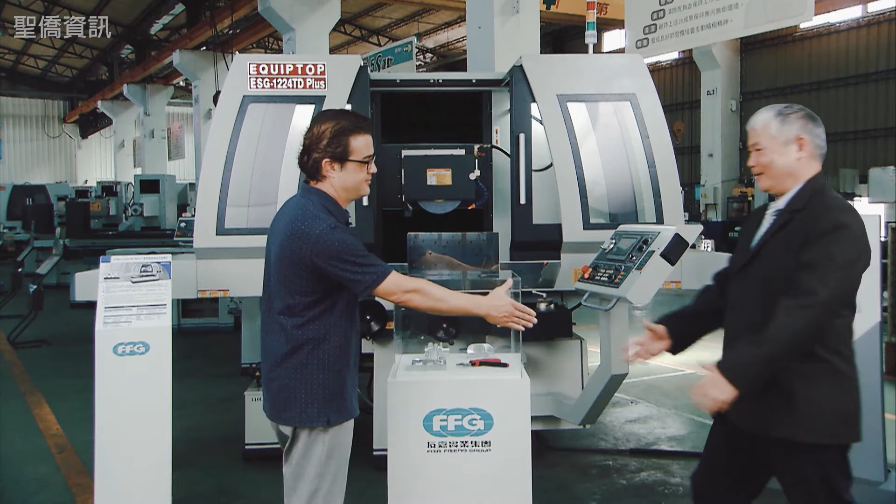Look at that. We're going to ask Charles how he did this. Charles? How are you? Nice to meet you too. How did you do it?

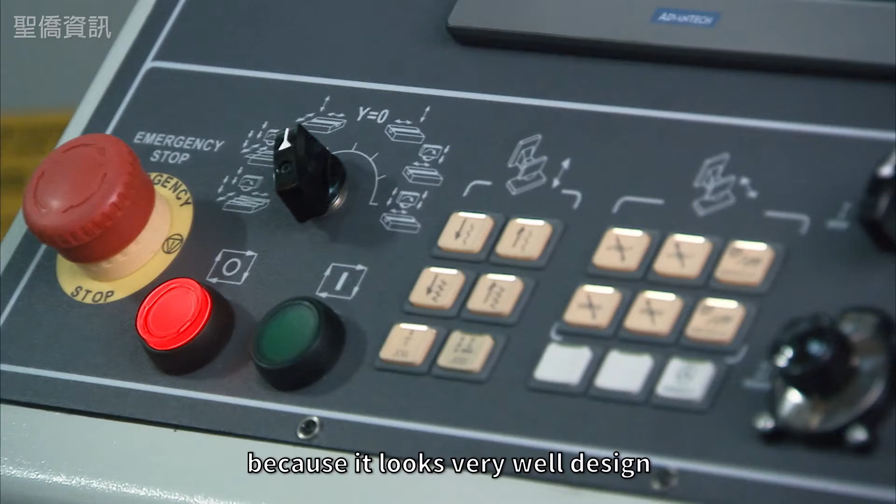Hello, Robert. Nice to meet you. How's it going, Paul? How are you? I'm fine. Good morning, sir. Can you show us how to use this touchscreen panel because it looks very well designed, very well laid out?

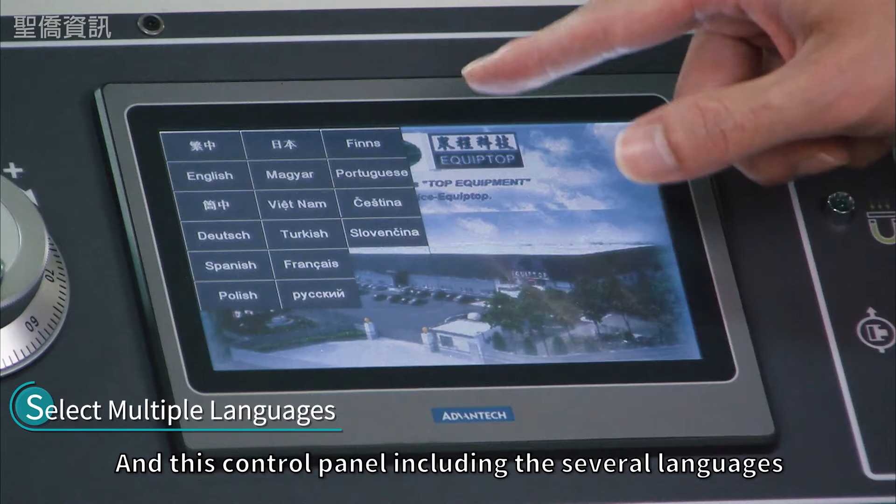Let me introduce the basic function. This controller panel includes several languages depending on the demand from the customer. I'll show you the English version.

This machine displays the Y and Z position here by the encoder device. And to set the touch point and the distance to go, the position, and the rough grinding and fine grinding micron setting.

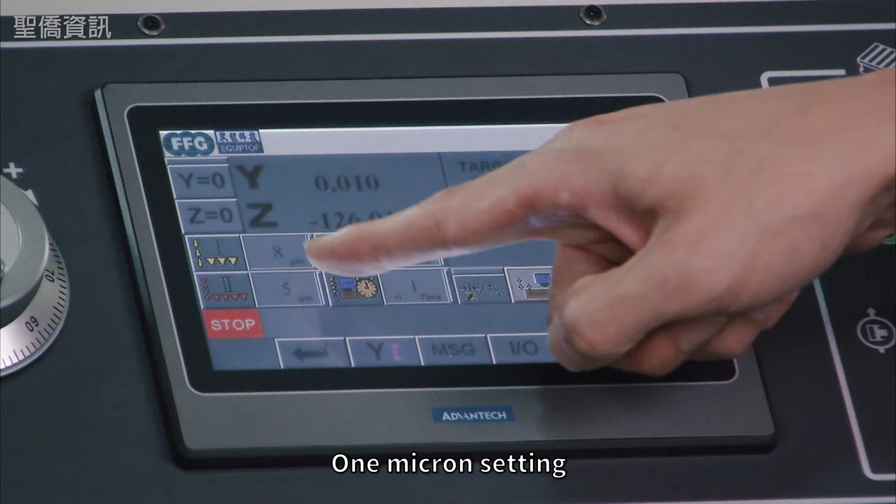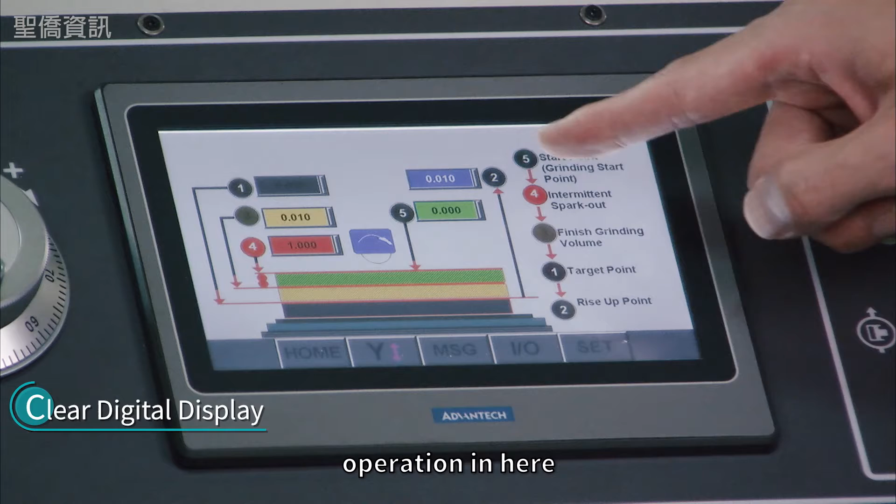This page is for setting the micro downfeed, the grinding value setting operation here. You can set the touch point, rise up point, and the finish grinding volume, intermittent spark out, and the start point. And this page will show you all the alarm message recording.

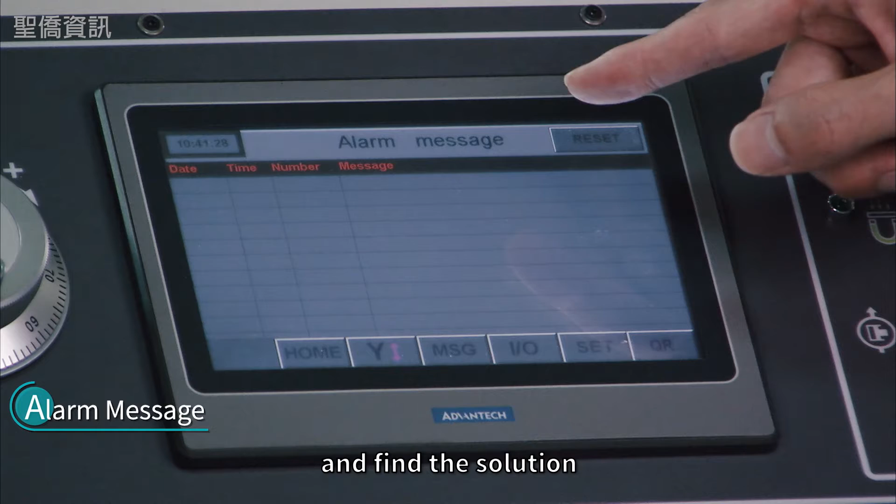Any problems, we can see it right here. We can see the alarm message showing and find the solution with the technician and the electrician immediately. Also, this IO monitoring page is to check all the devices, including how this machine is running here, such as the hydraulic system.

You can see each device, what happened. This is here, very detailed and comprehensive.

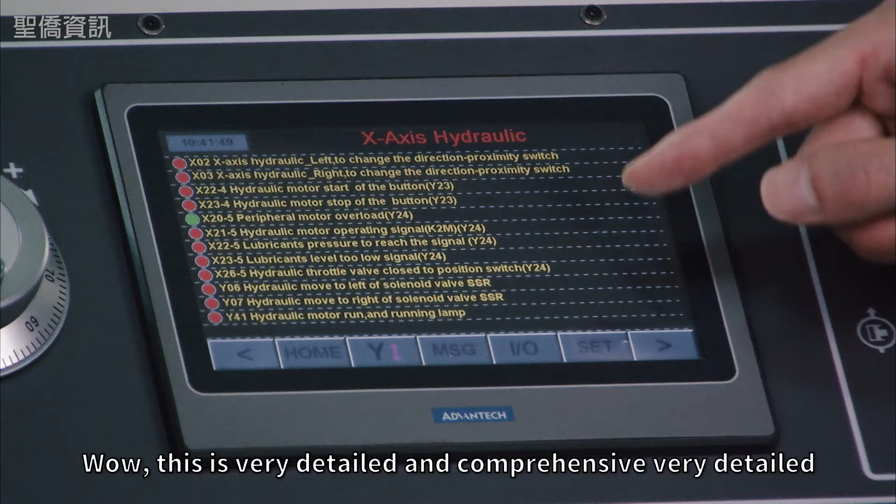You can see the servo motor for the Y-axis and its running condition here, like this one. And this is for the Z-axis servo motors.

Well, it's a very nice laid out panel. It looks pretty easy to use. It makes me feel like I want to get into the grinding profession.

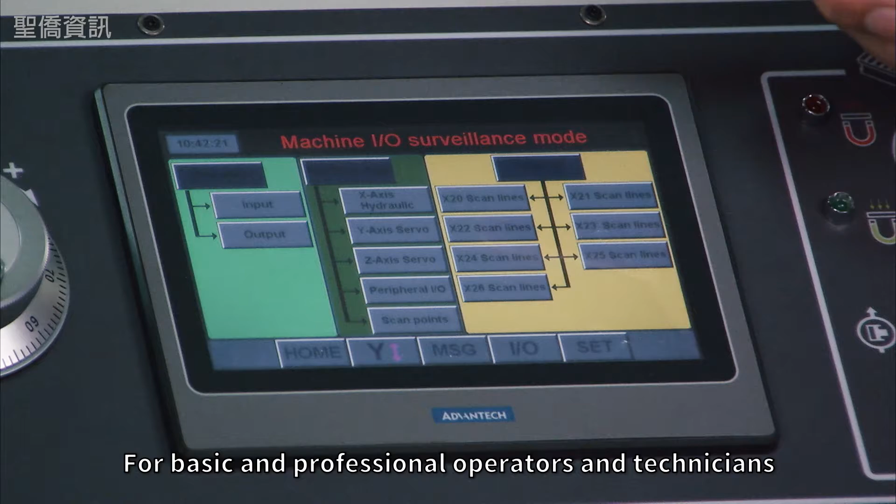Sure, it's a friendly operation interface for the basic and for the professional operator and technician. It's easy to understand how to use it.

And this is the parameter setting here. So any parameter could be set depending on the demand of the customer.

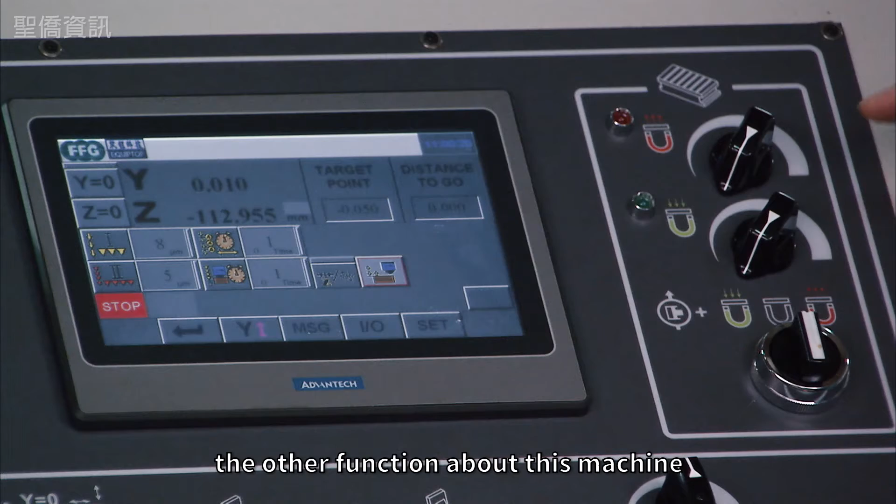So we'll show you the other function about this machine. Now turn on the magnetic power here. And adjust the magnetic power to the maximum here.

And finish grinding. Now this is the demagnetizer. It shortens the demagnetizer time here from this knob. This is a basic, easy function to control the magnetic power here.

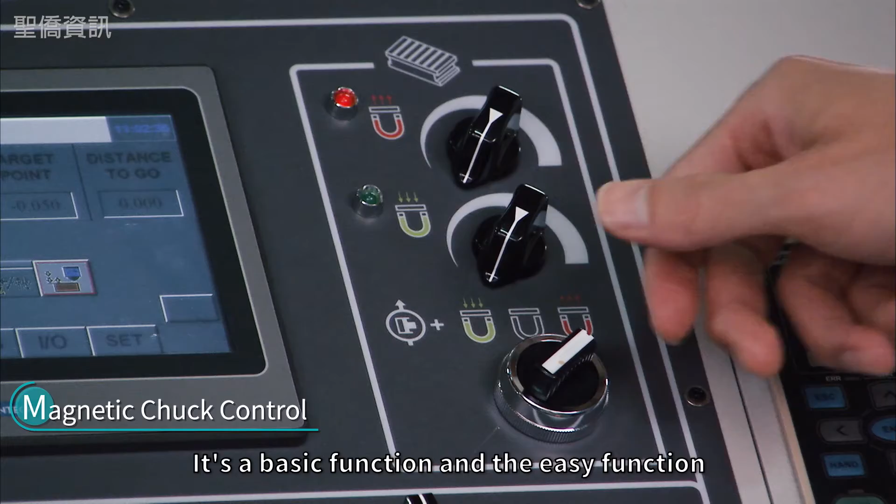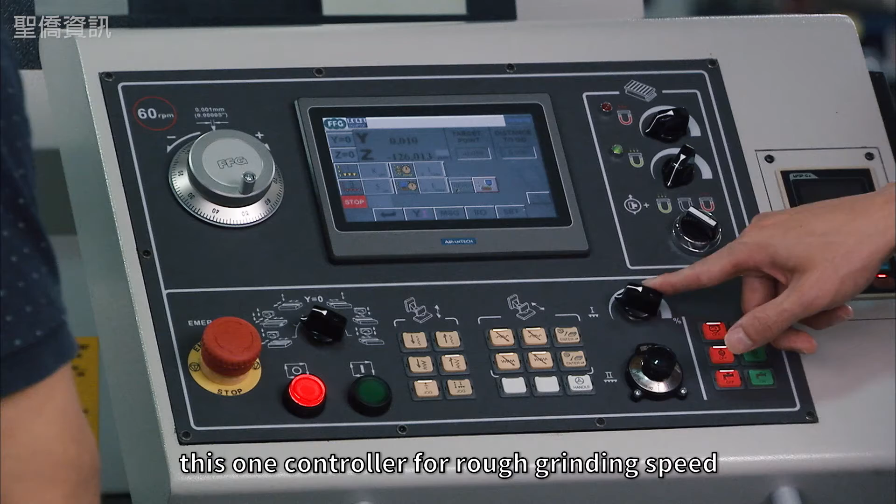And this one is to control the grinding wheel, hydraulic system, and the coolant system here. And this one controls the rough grinding speed, and there are 5 grinding speeds here.

I see you even have the MPG in the control panel. Yes, this MPG is a standard function for this machine. It could be adjusted 1 micron each down when you turn each graduation here.

Wow, that's very easy. It's very fine resolution here.

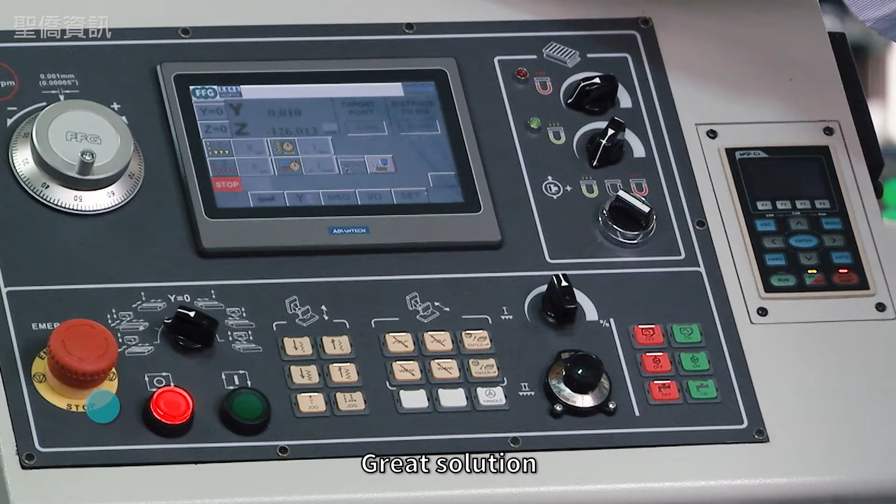And this is for setting the point for backward and forward position here. When you want to operate the cycle start here, just push here.

Hey, I think I can do this myself. Yeah, you can see yourself.

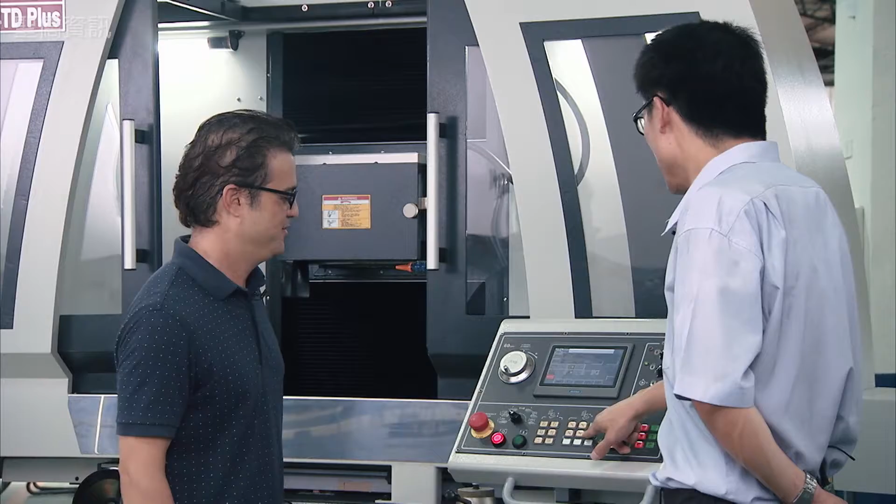Very good. This is to move the machine. It's manual, and it's easy manually.

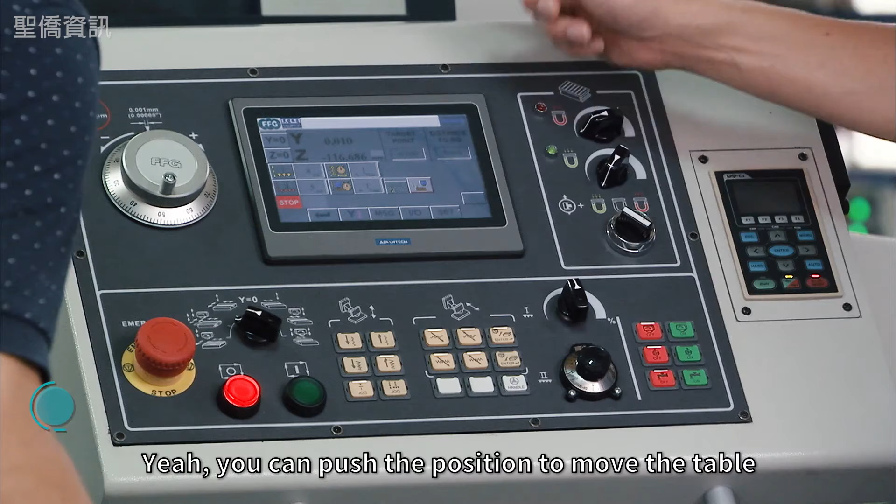Real-time position. You can push the position to move the table, depending on the size of the workpiece here.

And this is vertical, up and down. And this jog is for 1 micron down.

When you press one time, the 1 micron down is easy.

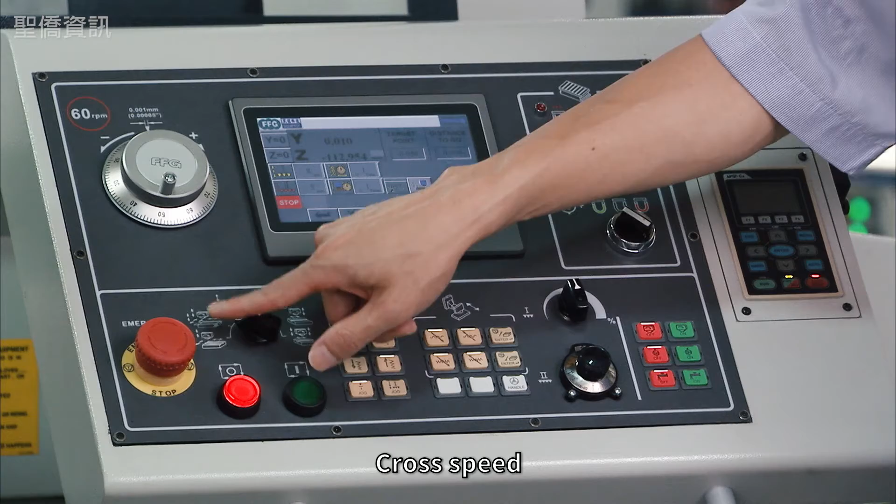And this includes the cross speed, and this continuous cross speed.

You can select a different grinding mode here. So this is the standard and the professional grinding machine. Now, what is this over here?

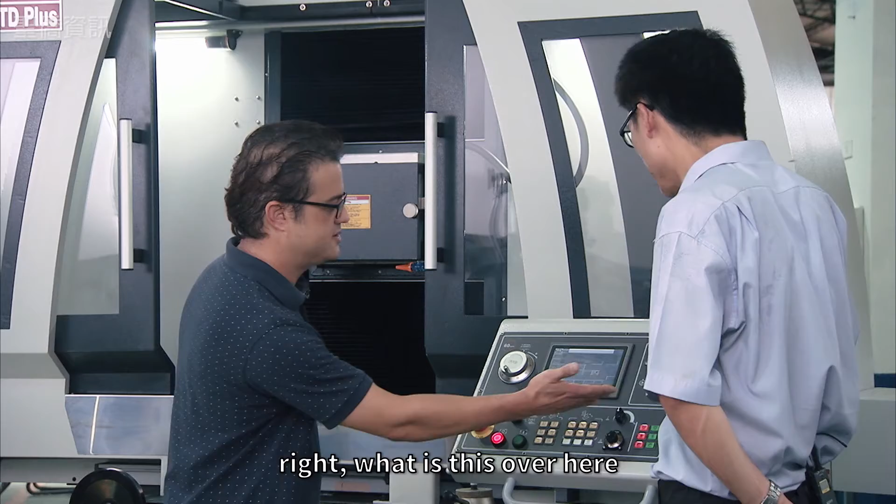And this is the inverter to control and adjust the speed of the grinding wheel.

So you can select faster or slower grinding speed, depending on the grinding material, to provide higher accuracy and surface finish.

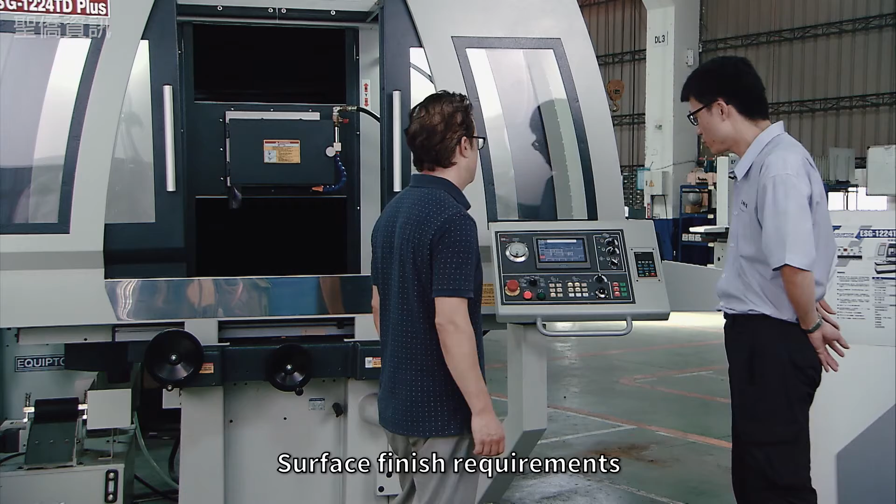Surface finish requirements. Now, Paul, can you tell me a little bit about the structure of the grinding machine? Because that is a critical part for your whole operation, precision, and accuracy.

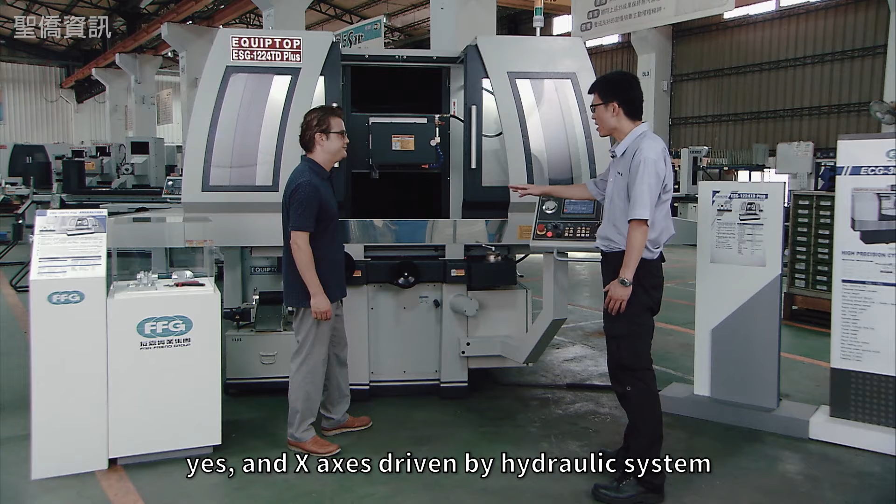Our machine's base and column are made of high precision and stable iron casting supplied by Meehanite for the machinery body. The machinery Y and Z axis are driven by servo motors inside the electric cabinet.

The X axis is driven by the hydraulic system, and this hydraulic valve controls the hydraulic power and the speed of the machine running.

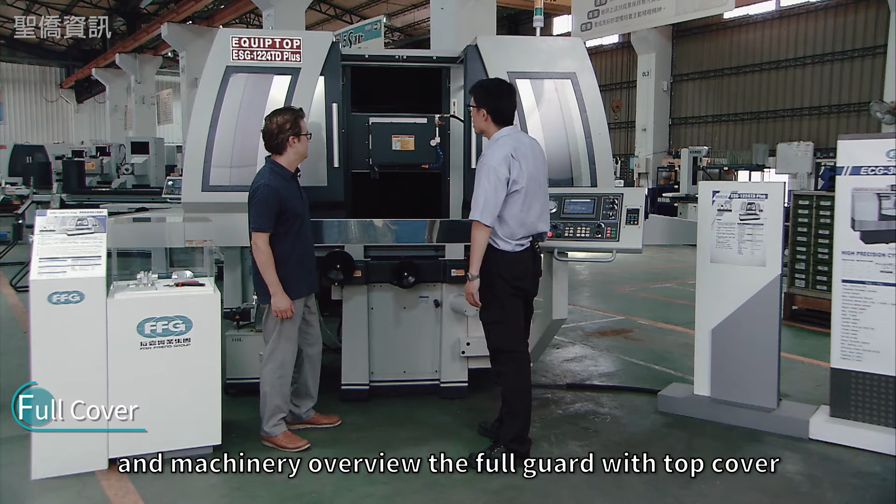The machinery overview shows a full guard with top cover to provide better protection for the operators. The bearing inside the spindle is supplied by NSK with higher accuracy and quality, precision, high quality bearings.

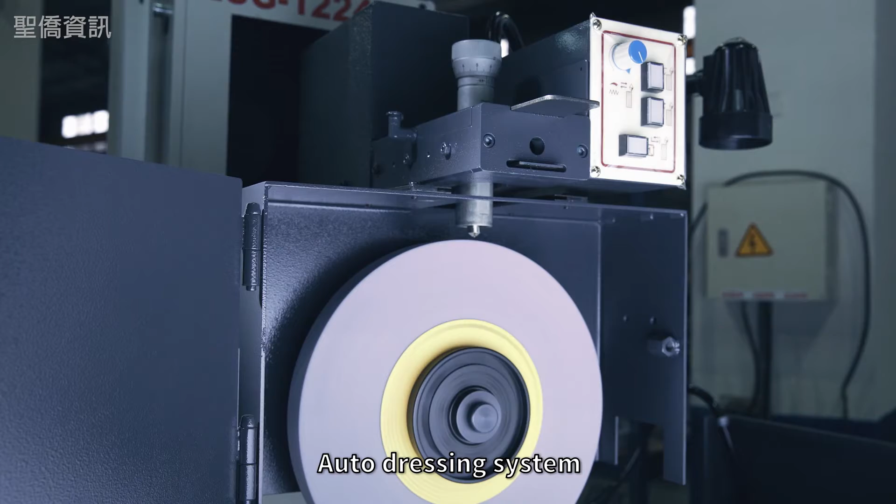We can install the optional auto dressing system and compensation system on top of the grinding wheel. Normally this is an option, our ADC system.

Now we're going to hear from Paul more about the smart manufacturing capabilities. It's intelligent, it's networked, and it's got lots of features to help the operators. This machine, the ESG1224TD Plus, is the best way to Industry 4.0. Later I will introduce information about the network and monitoring system assembled in this machine.

This machine includes cloud computing, big data, HMI, and IoT system. It also provides efficient network service such as integrated network information with in-time maintenance guidelines, remote checking and system maintenance, reducing service time and increasing efficiency, also collecting maintenance data and building a database.

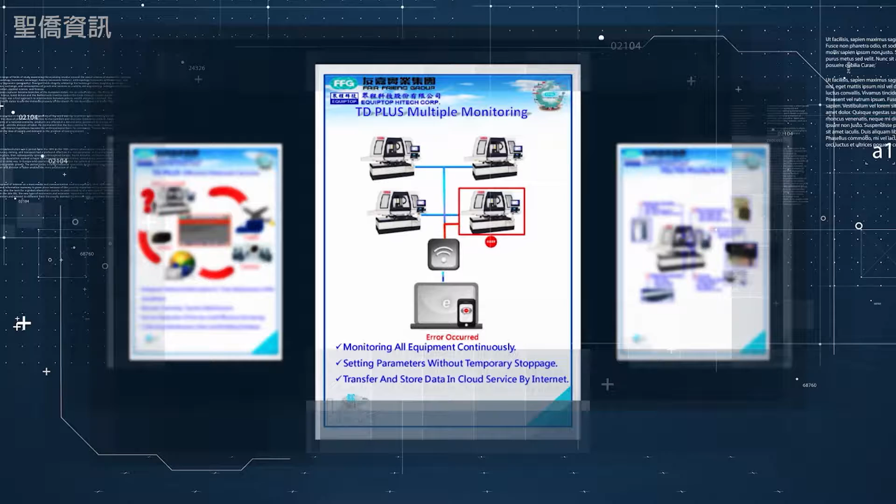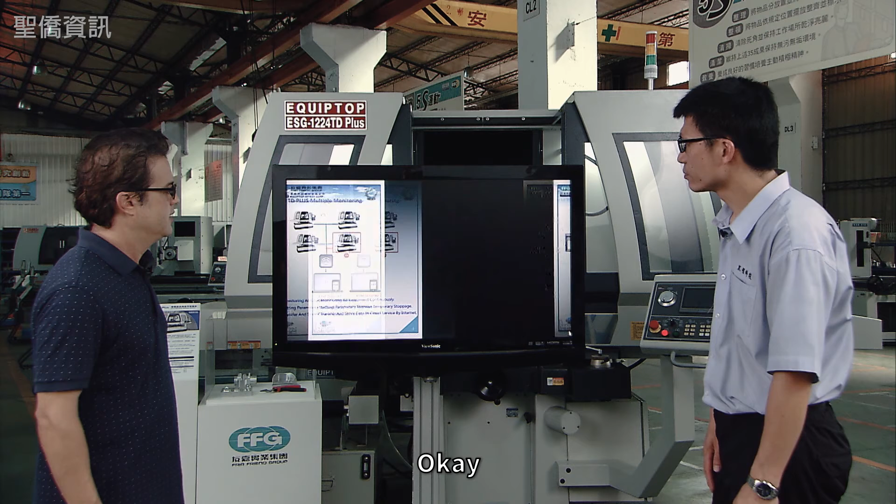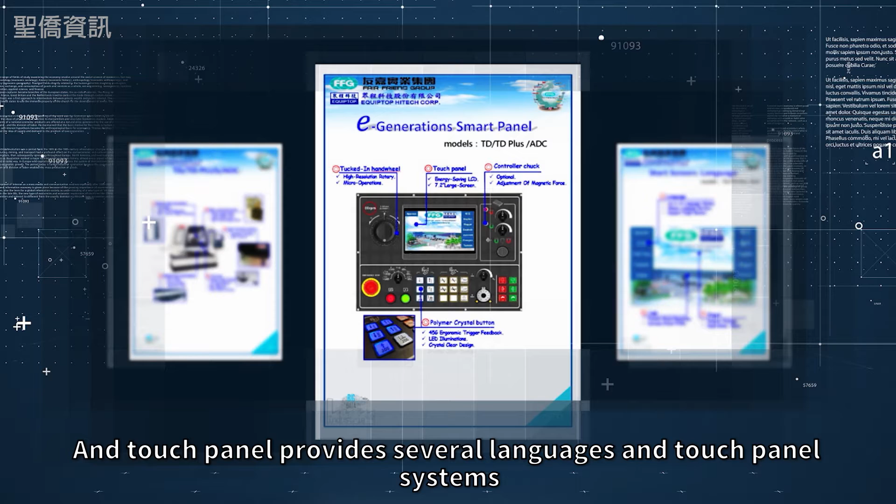The machine's PLC panel has a hand wheel to control the micro downfeed, and the touch panel provides several languages. The controller chuck provides convenient operation for the mechanical power controller system.

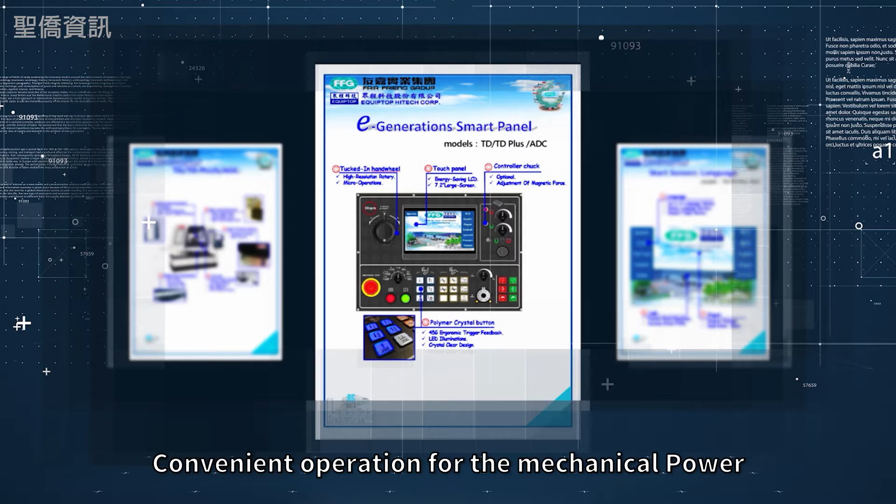The TD machine includes several languages for operation, easy and convenient for the demands of customers from different countries.

The digital man-machine interface includes the high precision spindle, electronic billboard, production record, and spindle status.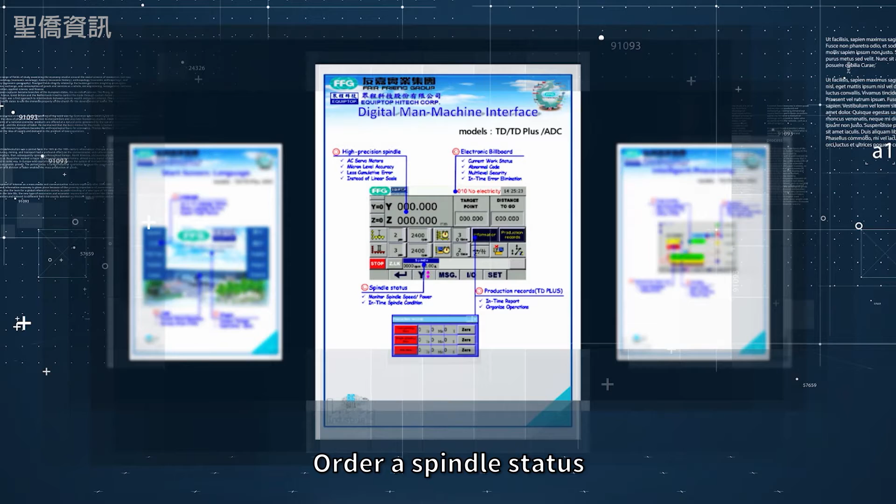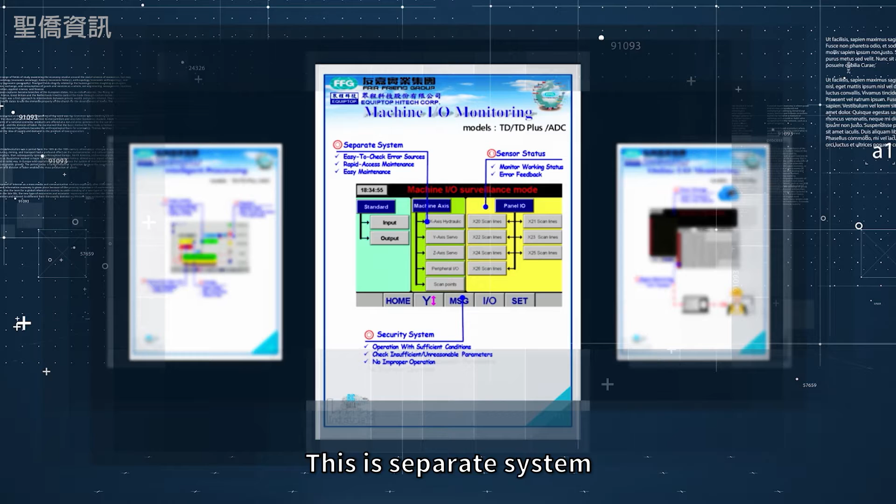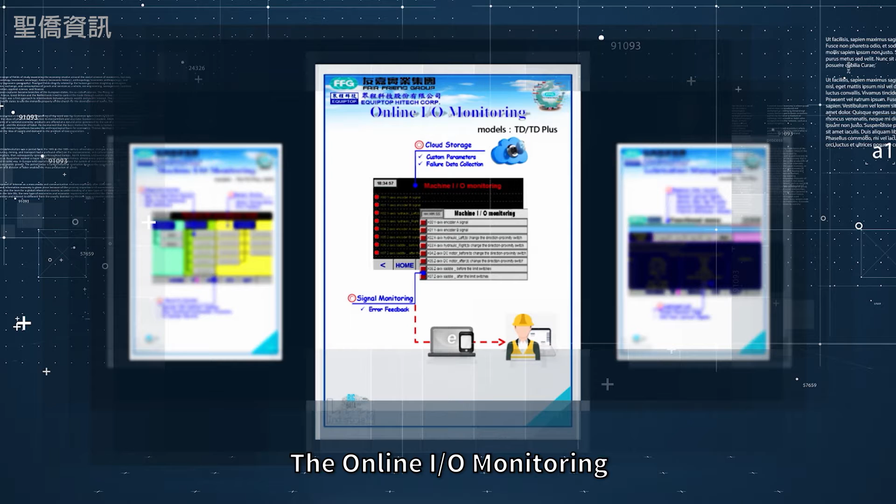The machine I/O monitoring is a separate system, with sensor status and security system controller system. The online I/O monitoring provides cloud storage and signal monitoring for error feedback from the manager and operator systems.

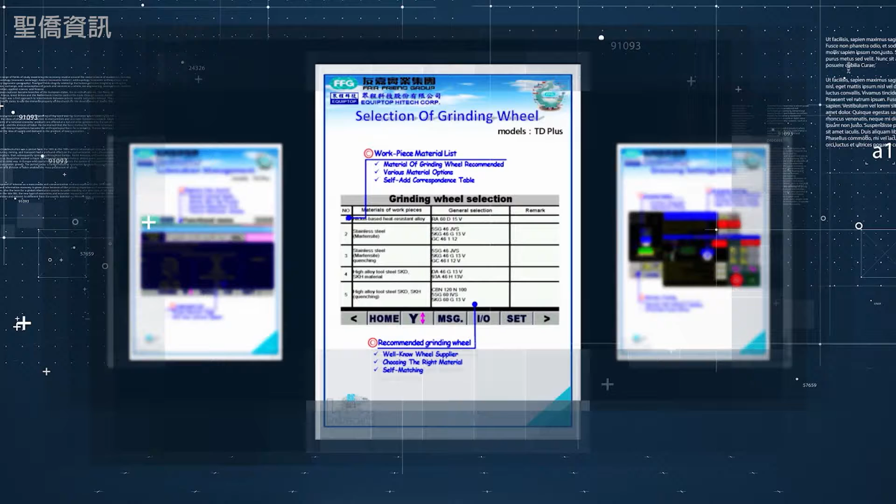Selection of the grinding wheel depends on the material of the workpiece, and the customer and operator can choose the available materials.

The ADC system means the auto dressing and compensation system, providing dressing display, parameter setting, and mistake proofing.

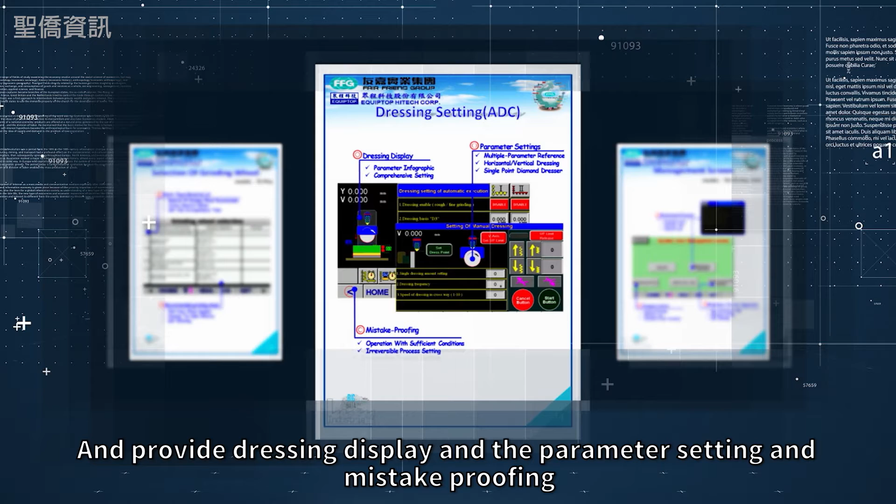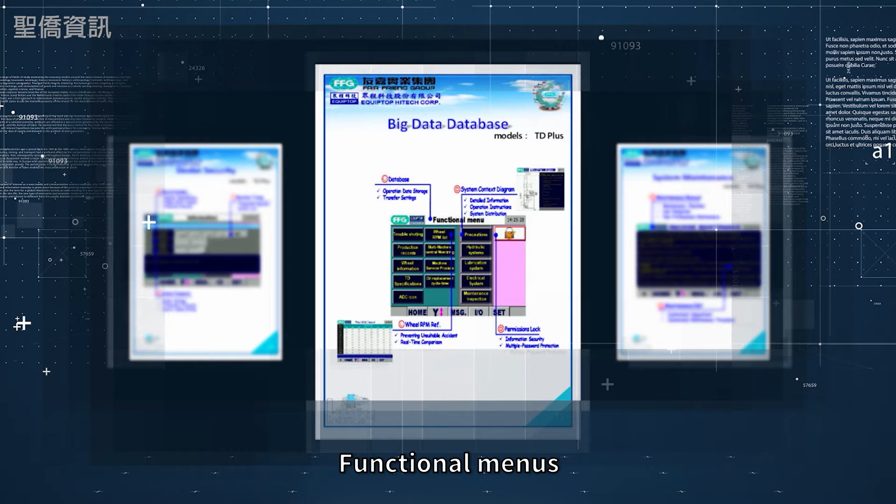The big data database provides functional menus, and the system maintenance provides machine maintenance parameters and setting parameters.

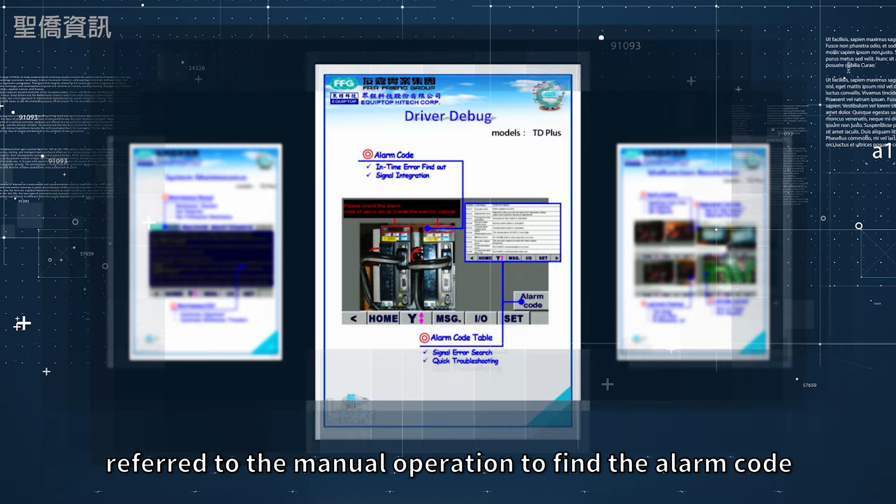The driver debug shows the alarm code displayed from the servo motor, and the customer or operator can refer to the manual operation to find the alarm code and possible solutions.

Finally, this machine has received patent certification for the controller in Taiwan, providing necessary and helpful information for the customers.

That's amazing, it's got so many features. You got a patent, you have smart features, it's intelligent, it's networked, it's everything somebody could want in a grinder. Thank you very much, Paul, for sharing this. Thank you, Robert.

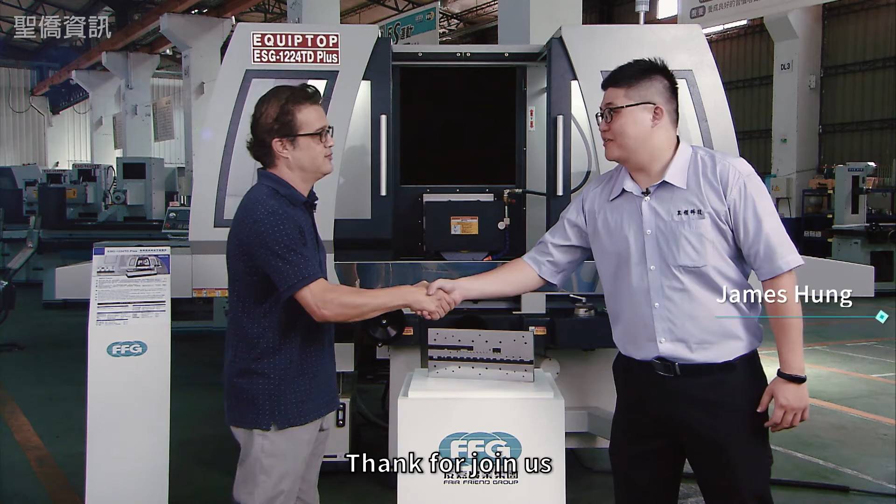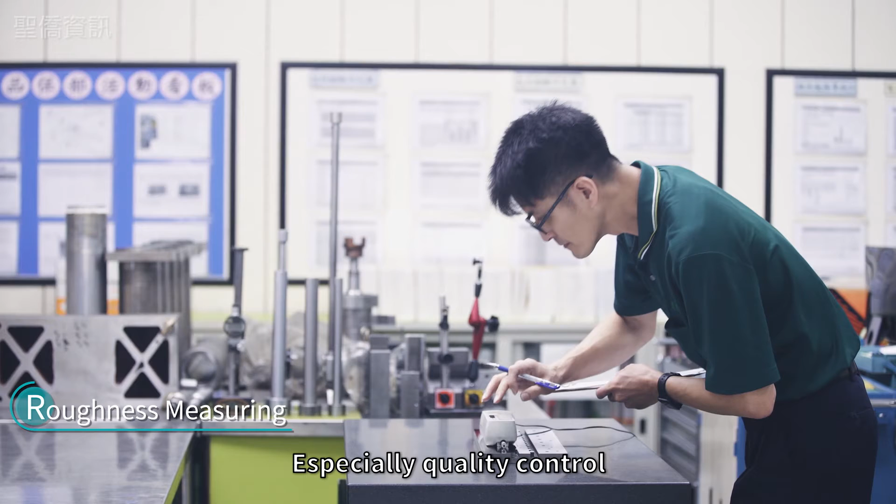Your boss said to make a beautiful workpiece like this with a perfect surface finish requires really important things, especially quality control. Can you tell us a little bit about how you guys do it here?

First, I want to introduce our spindle, that's the key part, very important for our grinding machine. And in our spindle room, it's a small dust-free room.

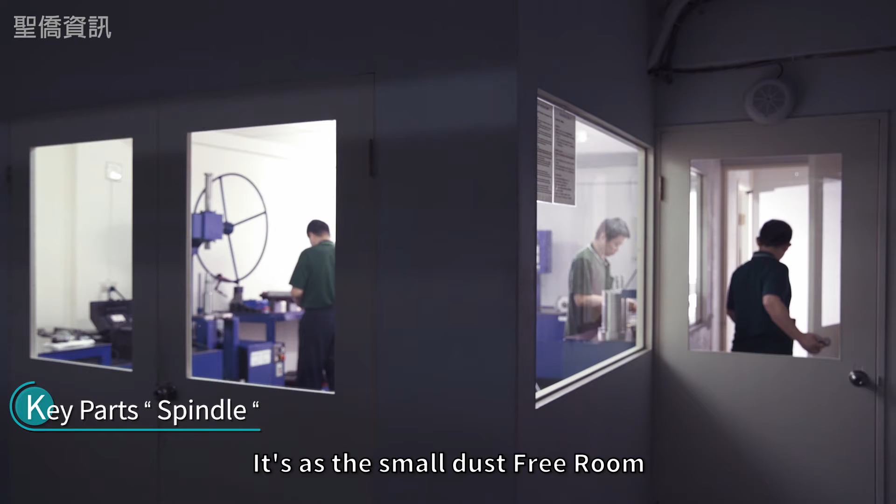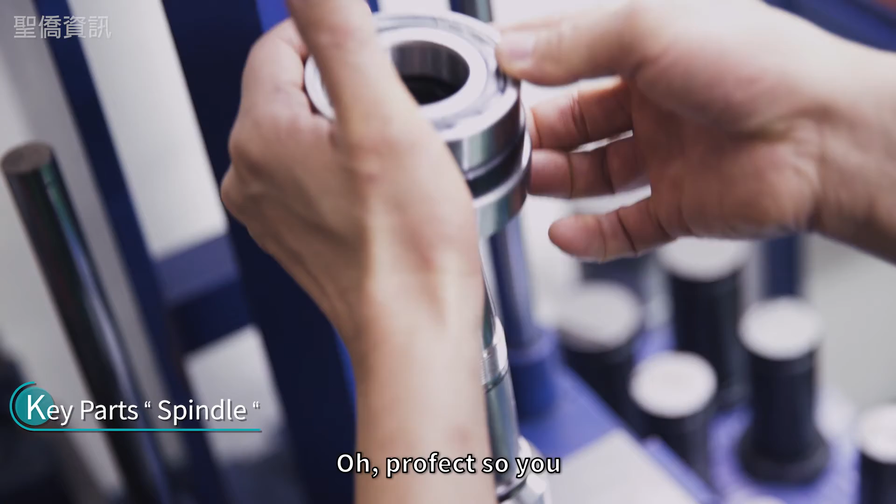Because we have to ensure our spindle will not be contaminated during the assembly process. Oh perfect, so you assemble your own spindles. Yes, that's really critical, because if you handle this part well, it's going to make a perfect machine. That's great.

Now, I see lots of signs around here, and I'm going to feel that there's something different you're doing here for your manufacturing and your quality control. What do you guys do here that's different? Let's call it lean manufacturing.

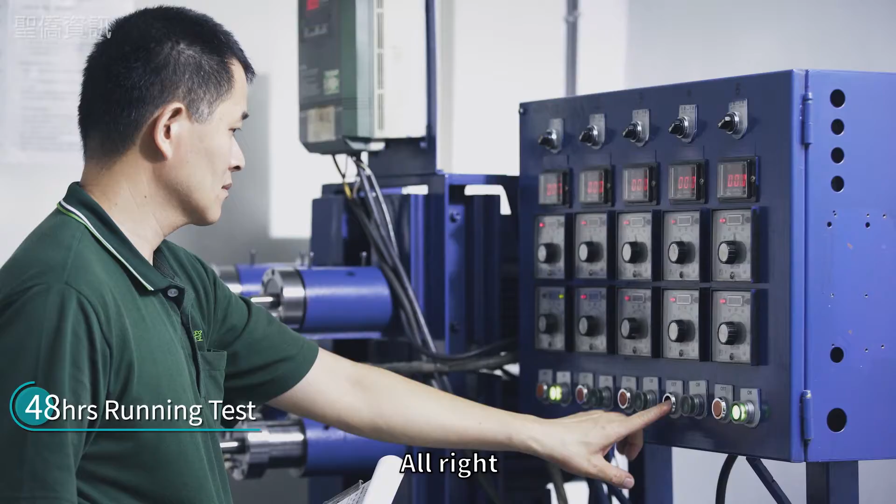Oh, lean. It's very strong. And the most important part is continuous improvement. Now, that's not easy to do. I hear from a lot of people that this kind of system is very painful at the beginning.

Yes, it's really, really tough at the beginning, but after you use it, and then you rely on it day by day, you can't keep away from that.

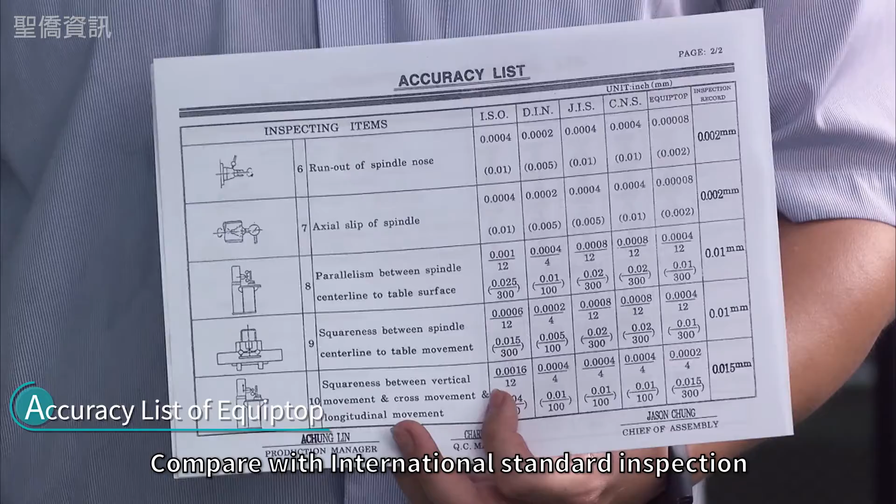Perfect. Now, I saw that you have some kind of list here. This has something to do with how you inspect each machine, right? Yes, this is our accuracy list. Compare with international standard inspection, like the ISO, DIN, JIS, and CNS.

So we set up our own standard. Oh, yes, I see. So all these Equiptop standards are a bit higher than international standards. Even higher than international standard.

Well, let's see some grinding. Can you show us? Okay, let's go.

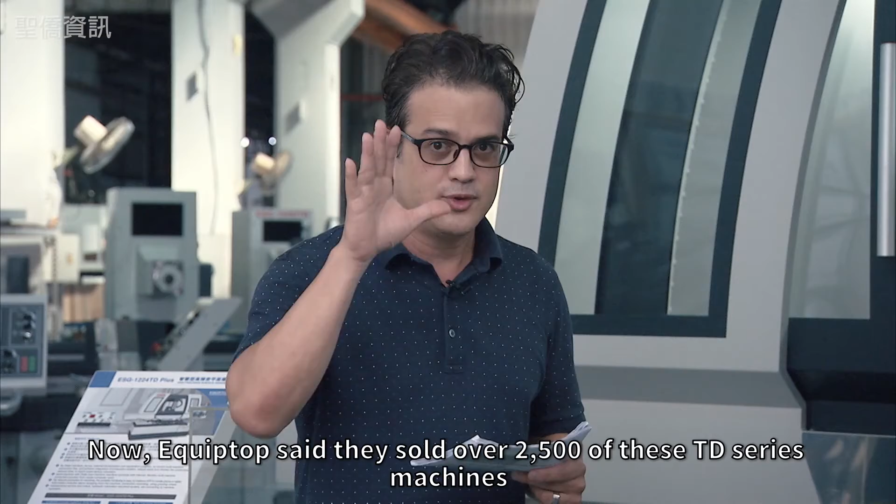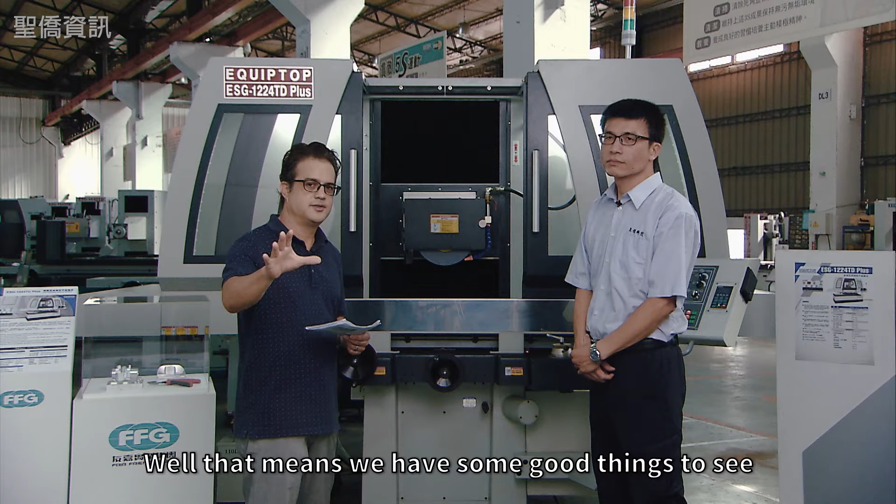Now, Equiptop has said they've sold over 2,500 of these TD series machines around the world. That means there must be lots of customers who have good things to say about these machines, right, Paul? Yes, sure. The areas we're selling our machines not only in Taiwan, but also to the United States, European countries, Asian countries, and other countries as well. So later we will show some witness videos from our agents in the world. Excellent. Well, that means we have some good things to see. Stay around and see some witness testimonials.

Hello, everybody. My name is Luboš Valenta, and I'm the founder of EDM Trade from the Czech Republic. Our company has been cooperating with the manufacturer Equiptop for more than 10 years, and our experience has been really, really good. Their products are of good quality and bring value to the customer. If service is required, the manufacturer will provide support to our technicians. On my behalf, I would recommend the purchase of Equiptop to the customer. Really, I do. I wish you all the best. Bye.

Hello, my dear friends. I'm Alexey Brudikhin from iMachine Technology Company located in Russia. Equiptop is our best machine tools partner in Taiwan. We've been cooperating with Equiptop for more than 10 years. For this period, I have sold many Equiptop machines. Once our customers buy Equiptop machines, they keep buying more and more, because they understand they get high quality, high precision and durability for a very reasonable price, which is very important now when the world economy is very unstable. Sometimes our customers don't have an idea how to machine their workpiece. In that case, Equiptop provides a perfect technological solution which is highly appreciated by our customers.

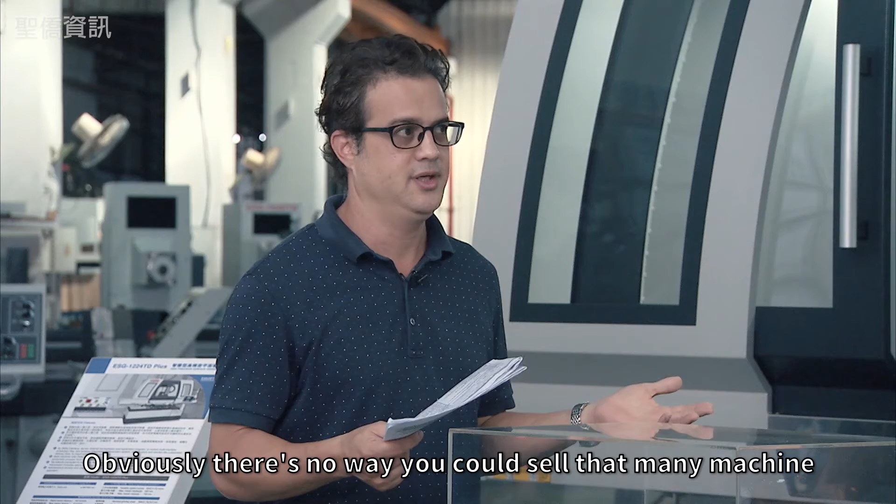Now we have some questions here that customers are asking Equiptop, and I'm sure Paul has all the answers. You have over 2,500 machines sold around the world, so that means these machines are pretty stable. There's no way you could sell that many machines if it's not a good machine. Now, some of the first questions we have is really what's the difference about this grinder compared with others available in the market?

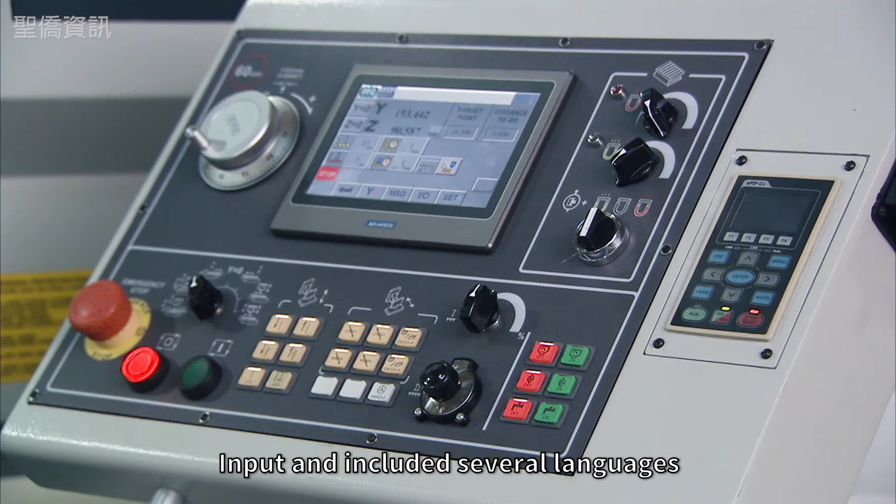The main difference between our machine and the competitor's, I can give some information. The first one, our machine could be input and included in several languages for different customers, so the customer can understand how to use it by the message with different language versions, and operate the machine easily.

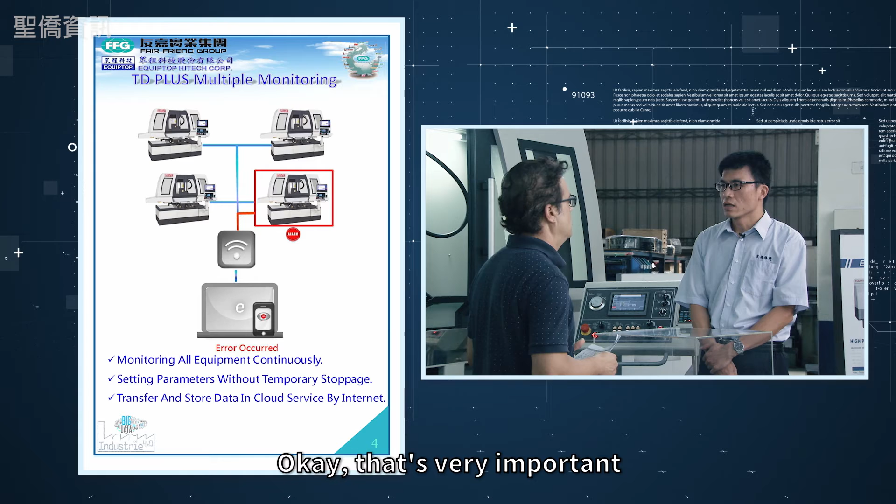The second, our machine provides an instant monitoring system. The service engineer and the electrician can find a possible solution according to the alarm codes displayed on the controller panel.

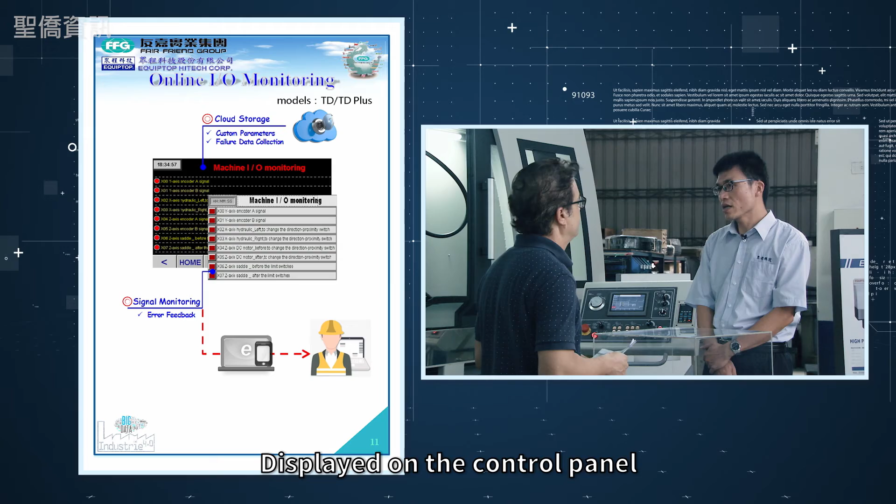The third, our machine could be installed with the auto dressing and compensation system on the top of the grinding wheel. So the grinding wheel has no need to go down to the table to dress the wheel, and the grinding wheel could be dressed by the dresser in the auto dressing device.

And finally, our machine has sold over more than 2,500 machines to the world. No matter in Taiwan or other countries, they are our best witness about our machinery's high quality and best information systems.

Now, another question. When comparing your machine with other machines, of course you have very top and tough competitors from Europe and from Japan. How do your machines compare to some of those top brands?

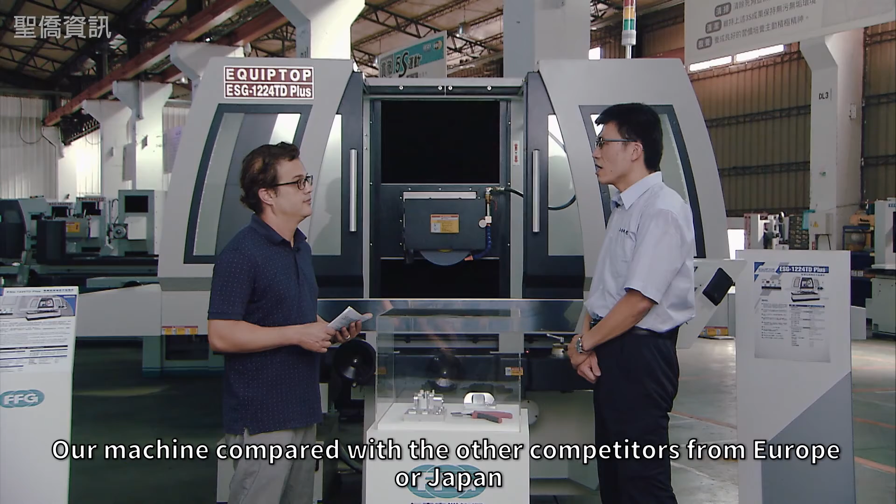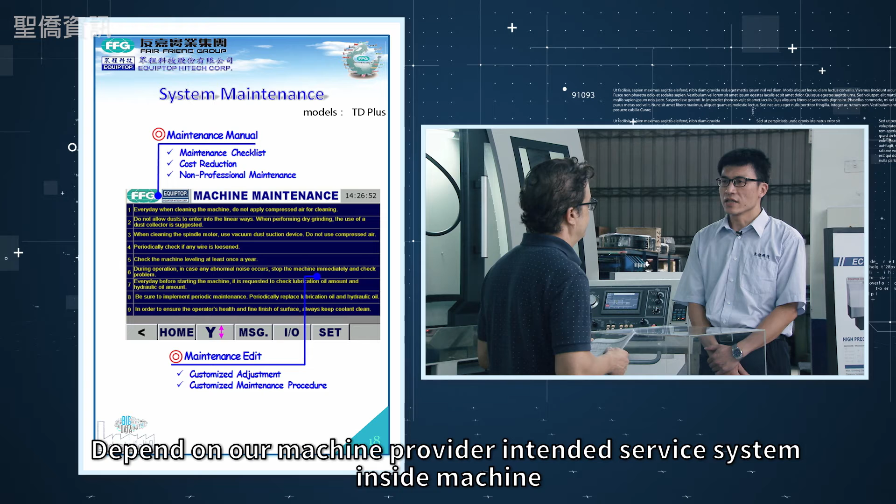Our machine compared with the other competitors from Europe or Japan, we can provide the machine with lower cost and higher quality, depending on our machine providing the instant service system inside the machine, network and monitoring systems. So it is better. Higher CP, cost of performance much higher.

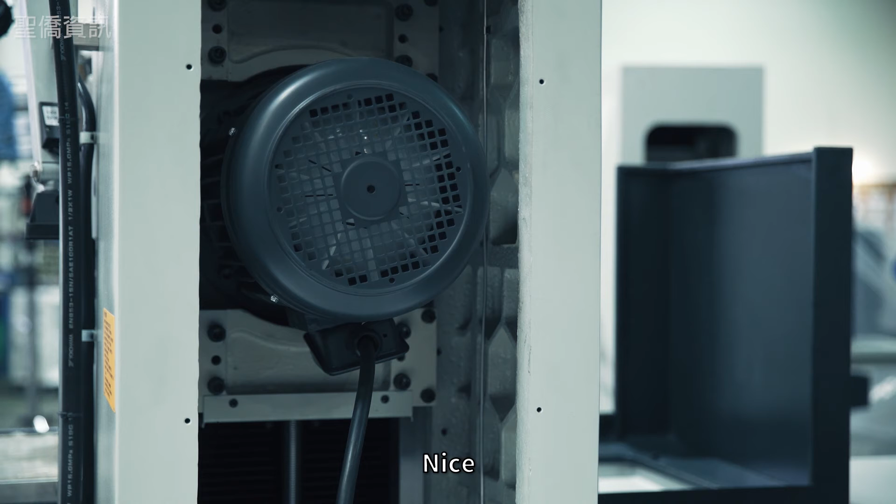Now, Paul, how do your machines compare when we talk about the quality of a European or Japanese machine? Our machine provides higher accuracy because of the monitoring system inside the machine, which provides necessary and helpful information to support the technician and operator to find a possible solution. Our machine also provides stable operation and nice quality due to the nice iron casting during the assembling.

Now we have one more question. When you compare to these other famous brands, what are the major differences? For example, compared with Studer, what are the major differences between Equiptop's machines?

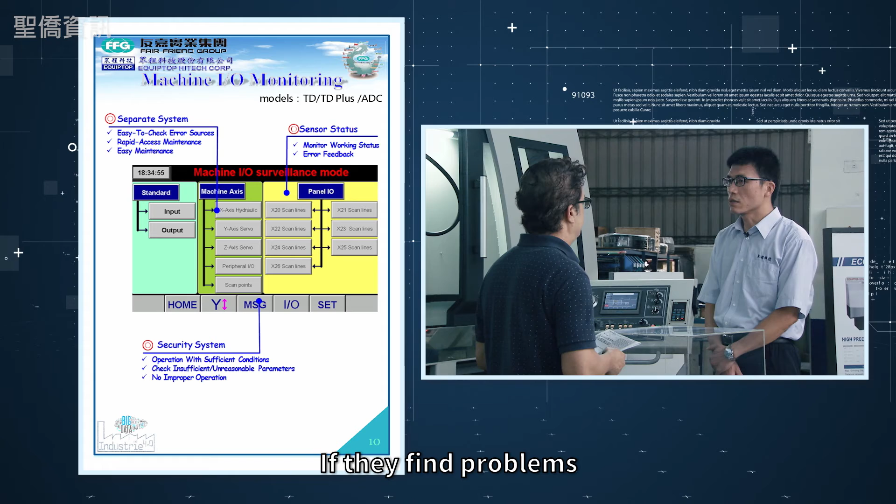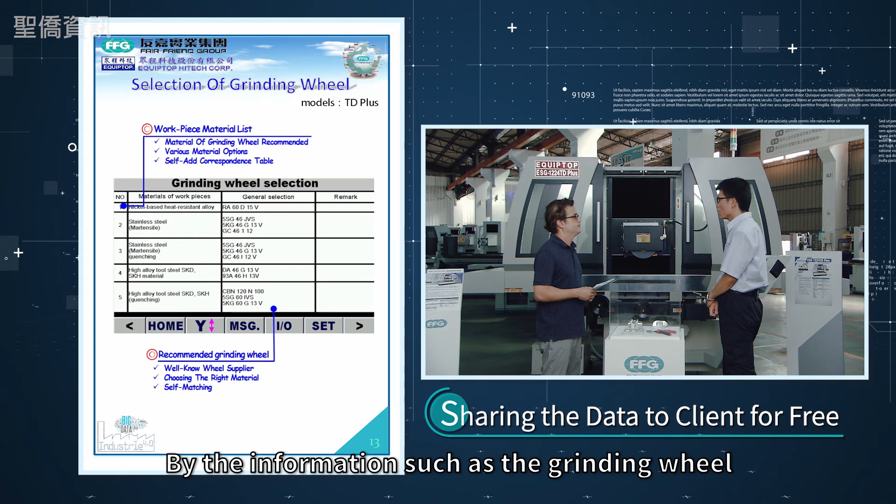I think our machine's main feature is the necessary information inside the controller system, providing helpful and instant service information to support the operator. If they find a problem, the operator could find a possible solution immediately by the information, such as the grinding wheel information and shortcut troubleshooting information.

So this is all within your database system. You have an extensive database. You sold 2,500 machines, so you have a huge amount of information. Our database inside the machine includes a lot of helpful information to support technicians during the grinding operation.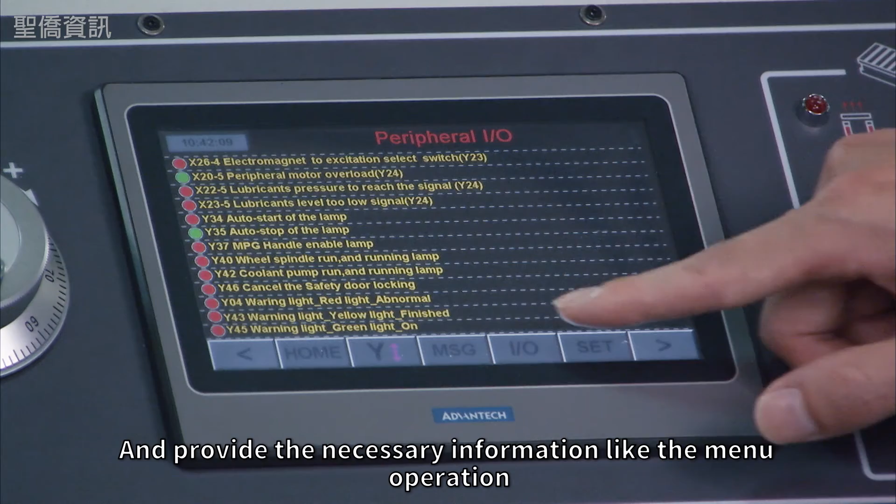Our machine is helpful to find a possible solution if any alarm code shows in the machine, and provides necessary information like the menu operation. The technician has no need to find the paper manual - you can use the controller to find any possible way. That's very helpful.

Now, how about application-wise? What kind of applications or industries is this machine suggested and recommended for? Our main customers use our machine focused on the mold industry, also auto parts industries. They can grind the mold with basic rough grinding or fine grinding to have mirror surface grinding.

Right, like some of the parts we saw earlier - here, the mirror surface grinding application.

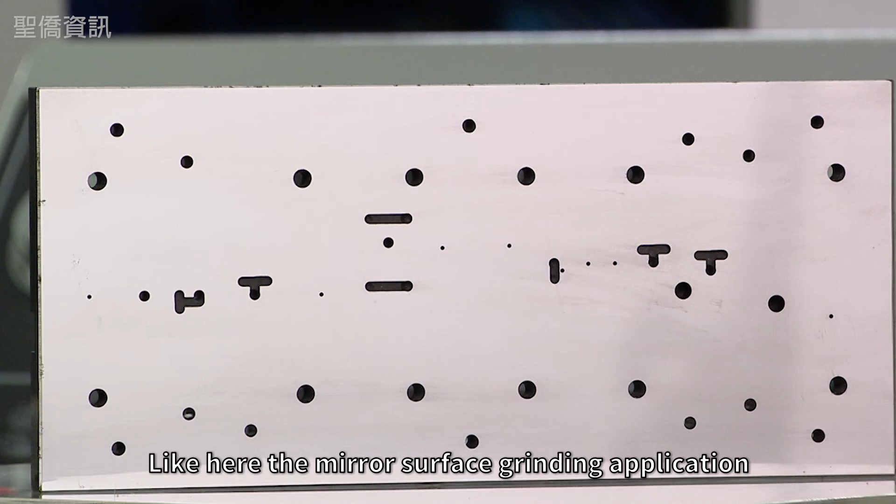That's great. Well, now, why is it that your accuracy is a bit higher than other brands out there? Specifically, what are the specific reasons why it's more accurate than somebody else?

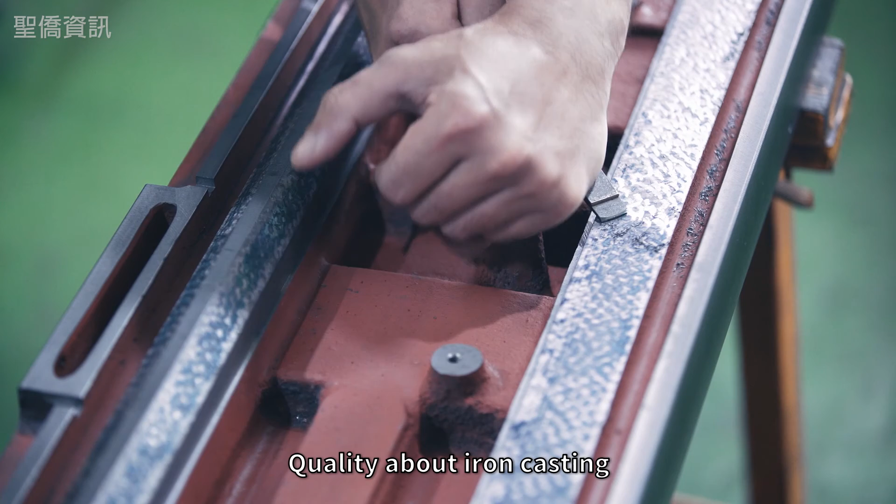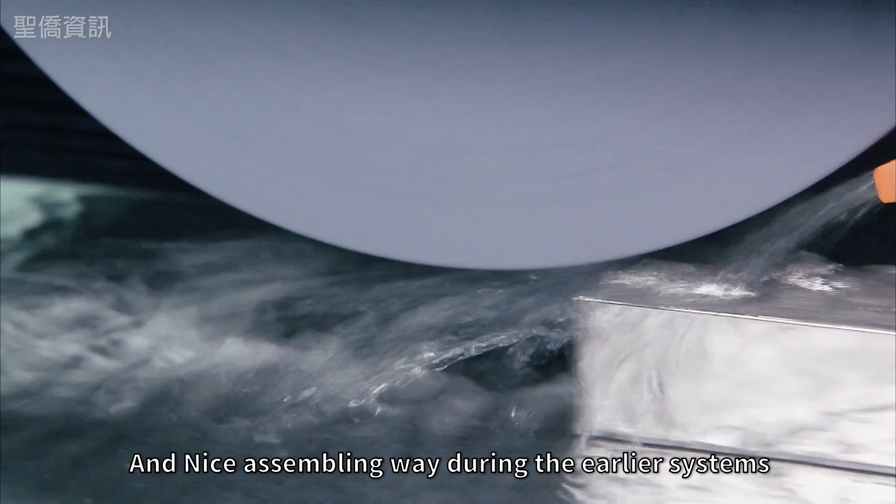I think the machinery accuracy depends on the assembling quality, also the quality of iron casting. Our machine is able to deliver better features because our iron casting provides heavier material and stable operation for customers. So our machine provides nice accuracy because of the stable iron casting and nice assembling, along with the instant service system and electrician support system inside the controller. So it is a nice choice for our machines.